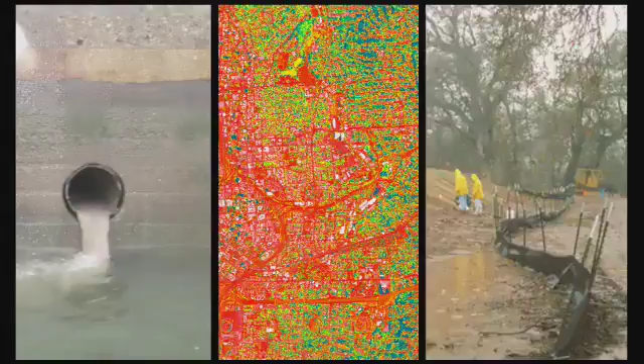We also see a lot of pollution that's happening because of a tremendous amount of runoff by removing our pervious surfaces, putting down impervious surfaces such as streets and roadways that take us out to these faraway places, and even just developing many of our urban areas, our plazas. We're removing a lot of landscape, a lot of green, and replacing it with hardscape that contributes to runoff. That picks up a lot of pollution, gets into our waterways, and causes a tremendous amount of problems.

The biggest of those problems is the amount of energy that's required by a city municipality to treat that water as wastewater and to cleanse it. It's estimated that about 30% of a municipality's overall energy spending is in a wastewater treatment facility to treat and clean that water. Contributing to that, treating water as a waste product rather than what we can actually do with it and treat it as a resource is a leading problem to some of today's landscape issues.

We're also seeing the removal of pervious surface contributing to heat island effect. I think we can all sense that when we're here in downtown Austin on a hot August day, the effects of heat islands, and how that can, in other environments, be mitigated through the use of providing more green space. And then lastly, taking a look at some of our construction sort of mode of operations.

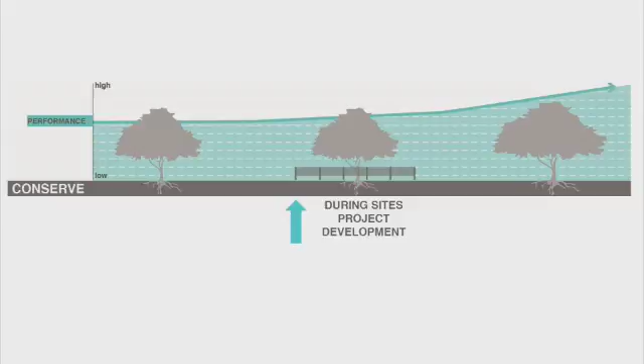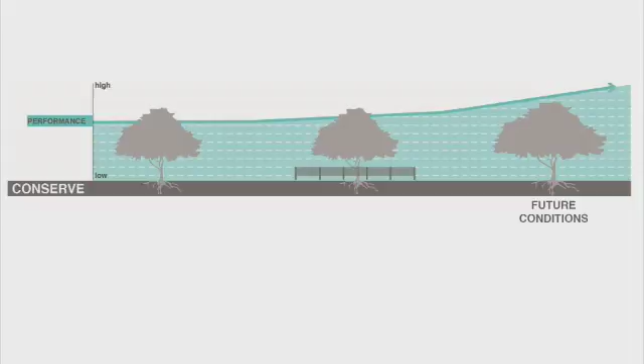Now, this could be a tree, a community of healthy plants, a natural water source that is thriving and doing well. This could be healthy soil that we have found through various types of testing. Any of these natural resources, we want to conserve them, protect them as they are on the site, and then as we go into the future conditions of the site, we see that the performance of the landscape continues to improve, continues to increase. And by the performance of the landscape, I'm simply talking about those ecosystem services. What are those ecosystem services that are on the site, and how can we conserve them so that they continue to give those resources to us and continue to build up and improve those resources for us.

The next hierarchy is management of the landscape. So again, approaching the project site from the beginning, finding something such as possibly an invasive species on the site that is beginning to decline the landscape by pulling resources from those natural, healthy, existing sources there, taking a look at those and what we can do with them. During site development, we want to remove or find a means to control those things that are stressing the site. And then also you can see we put up a border around the things that are existing so that we can protect those.

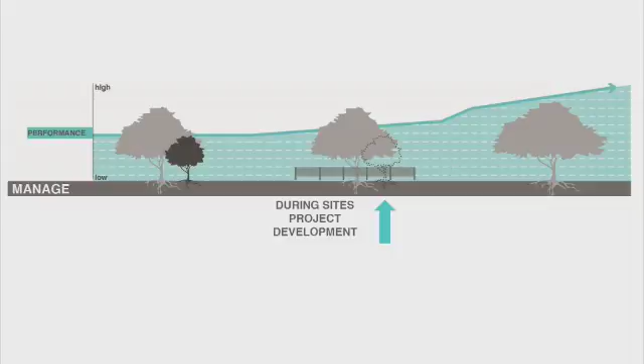So this is a dual management system where we're removing or controlling something that's causing harm while at the same time conserving and protecting something that's doing good. And as we see here, the performance of the landscape in the future conditions long term continues to improve.

The next sequence would be to restore. We oftentimes come across a site that has been degraded or damaged. The health of the site is declining. The performance of the landscape is at a very low level because previous practices or simply the introduction of invasive species or something is stressing the site and has caused a lot of those natural resources, a lot of those ecosystem services, to go away. And so we want to find out what those are, what they were, and find ways to restore them back on site.

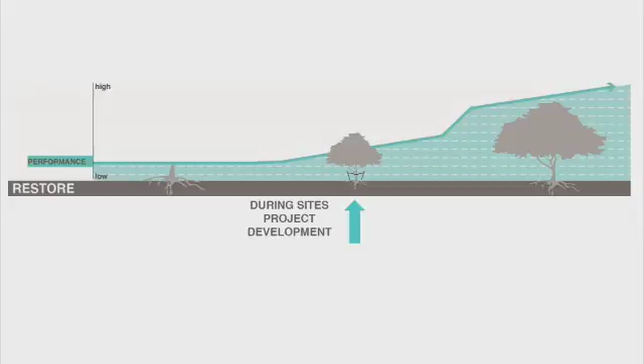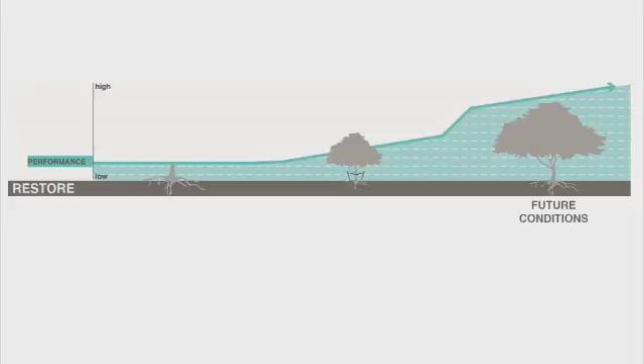So during site development, it might be something as simple as planting native or appropriate vegetation. It might be restoring a creek corridor or a stream bank, something that's going to provide those ecosystem services back to the site the way they were in their original historic conditions. And then we can see here very quickly the ecosystem services of that site, the performance of that landscape, quickly improves and provides back to us what was once lost.

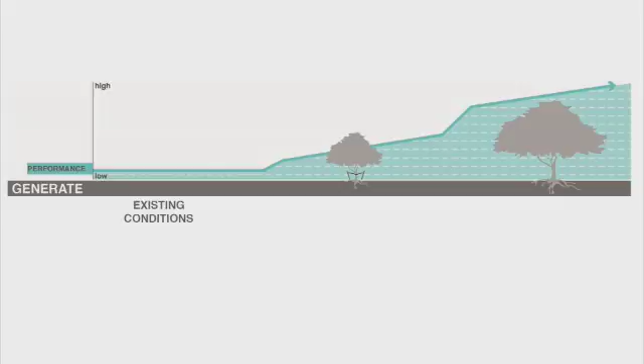And then lastly, if all other conditions are not existing on site, we have a tremendous opportunity to generate ecosystem services where they were not once there. So approaching the site, seeing the possibilities that are available, and introducing ecosystem services. Again, these could be regulating services, they could be provisioning services like providing habitat for pollinator species, they could be cultural services that provide habitat or a place to go for people to enjoy.

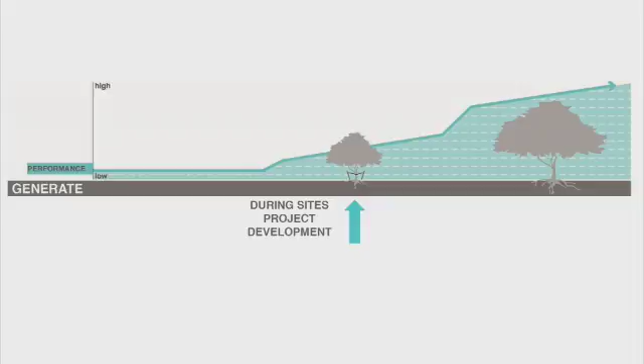Any of these ecosystem services I've mentioned before, there's possibilities on each and every site to generate those, and you can see that quickly the performance of the landscape increases. Any questions about that? We can stop, you can interrupt me, feel free, ask me anything. Great, keep moving on.

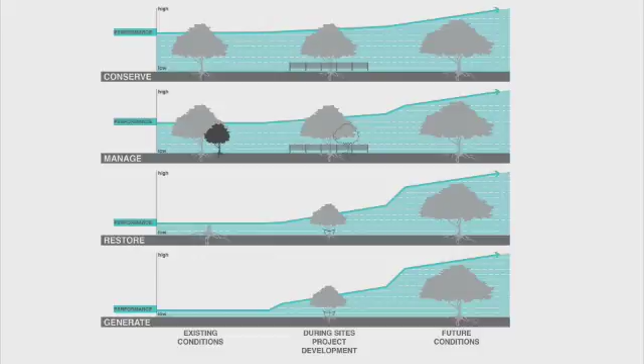So taking that hierarchy of how we make decisions as we design and develop our landscapes, that's what led to sort of this creation of the Sustainable Sites Initiative. And what we've done is, starting in 2007, we released a preliminary report. That went out to the public. We received feedback on that, used that feedback to edit and make changes, and we released the draft guidelines in 2008. This was the first full set of guidelines for people to take a look at and use.

Again, receiving feedback from the public, that led us to fully develop the rating system into the first version. We call this V1, the Guidelines and Performance Benchmarks. This was released in 2009. And this was a rating system that was available for people to access, but we also wanted to test it. We wanted to see how it actually worked and performed in the landscape and in the marketplace. So we created a pilot program. This program began in 2010.

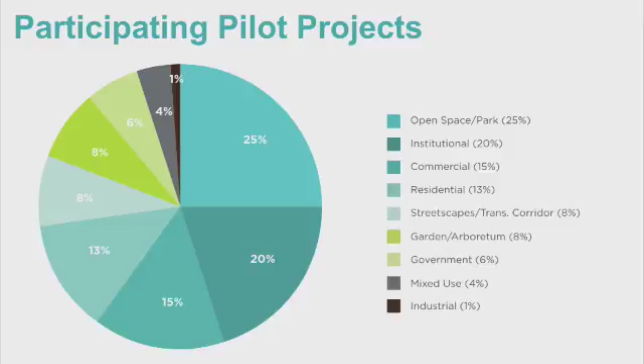These 150 projects that were tested, we have certified 47 of those under this first rating system. That pilot program has now concluded. It ended in 2015, which was our last round of reviews for projects. You can see here just a mix of all the different types of projects. Our smallest project is around 0.15 acres, and the largest is upwards of 126 acres.

The other 80 or so that didn't get certified, through the process of review, either because of where the project might have been at the time that the rating system was released. Sometimes projects take upwards of 10 years to get developed. Some of those were in the middle of their project already, and going back and having to backtrack for documentation put a lot of them at risk for not being able to continue their certification.

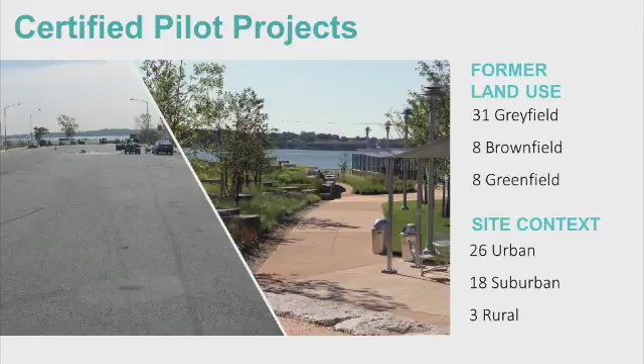And then one last thing to note about this breakdown of projects is that 31 were greyfield, or what we call a previously developed site. 8 of them were brownfield sites, and only 8 were greenfield, the first time the site has ever been developed. And then you see the breakdown there of the context between urban, suburban, and rural projects.

The documentation proved to be a pretty large task for a lot of individuals. Most of our projects were completed by landscape architecture firms or a combination of landscape architecture, civil engineering, architecture. But we also had a few that were just residential landscape designers that were needing some more clarification on what kind of documentation was needed.

We also wanted to combine our credits with some of the similar goals that are in the LEED rating system. So if a project has a building on site and they're pursuing the LEED rating system, how does that look in combination with also pursuing site certification, where there's some overlap, and where we can streamline that process to make it easier for project teams.

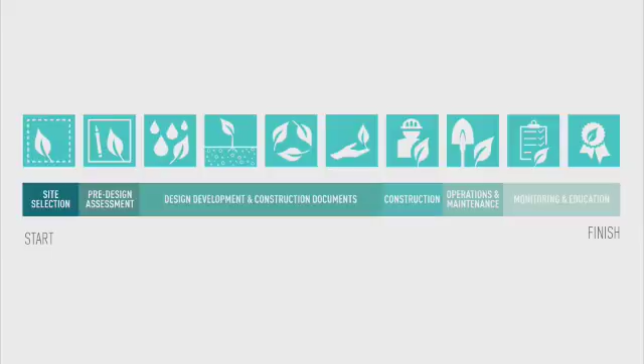And then we also ask construction contractors to restore soils, to restore some of those natural resources that have been damaged through either previous site development or during site development. We know that you can't protect everything while you're developing a site, that things will be compacted, things will happen. So we just ask that whatever damage is done gets restored so that the performance of the landscape increases.

And then after construction, once the site is open, having your operations manager, your landscape manager, maybe even some of you who may be in the landscape management business, providing a detailed set of instructions for the care of that specific landscape. One example is we had a project that went through 3 landscape managers because when the site was opened, a landscape manager was hired who thought they knew how to manage that landscape based on previous experience in Florida, and they were working in Texas. That didn't work out so well because the landscape is completely different.

So another landscape manager was brought on, same kind of issue, trying to manage a landscape from previous experience somewhere else versus what's actually happening on site. Finally, the third landscape manager got a hold of the manual, found out exactly what needed to happen on the site, and the site is continuing to do better because the management is detailed for that site specifically.

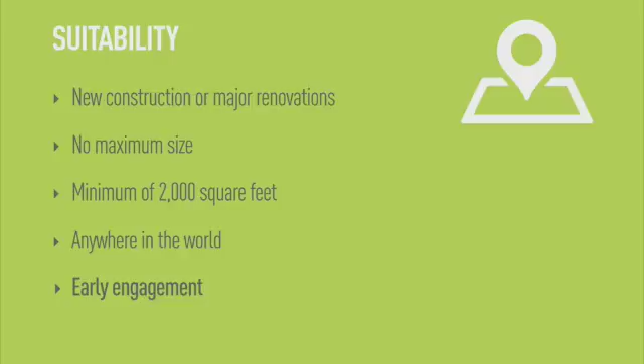And then lastly, sort of what was mentioned previously in a question is early engagement of the rating system from the beginning of the project rather than kind of coming in midstream and trying to adapt your design idea or your plan for the site to the rating system. Instead, use the rating system to sort of plan and guide the design development of the site.

Also from the Council on Environmental Quality, the guidance for federal agencies on sustainable practices for designed landscapes. This is kind of putting a call out to any government entity to design their landscapes on their federal campuses to be more sustainable and to support the pollinators that are within that region.

So we're seeing this is sort of part and parcel to what happened with the LEED rating system. Now it's a requirement for all new federal government buildings to achieve a certain LEED rating for the building. The Sustainable Sites Initiative is beginning to gain traction in the same vein, and we hope to see that it will become common practice for federal landscapes. Yes?